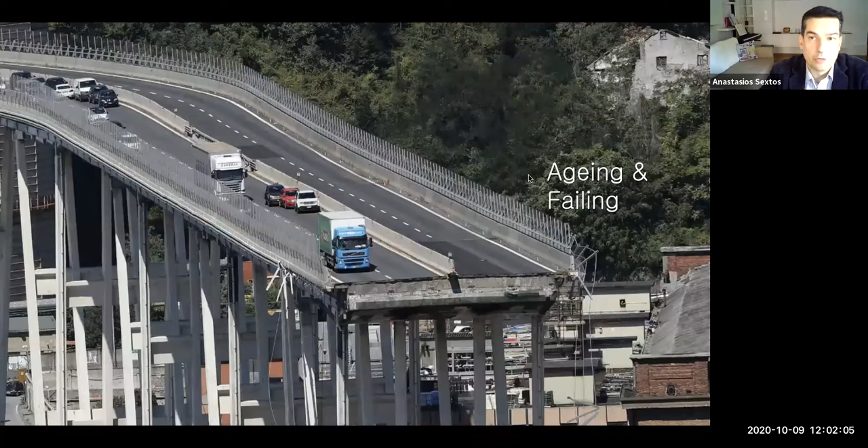So I'd like on my side to share some thoughts with respect to the quantification efforts on seismic resilience for infrastructure communities based on work that we have done in Bristol. All the speakers today have highlighted how complicated this quantification is given the connectivity of our infrastructure and the vulnerability of all assets exposed to seismic hazard and all other sorts of hazards, which can extend from floods to snowfall, fires, man-made hazards, and several complicated gathered issues that our structures experience on top of the obvious fact that they're aging continuously.

So resilience has, as we all know, attracted great scientific attention, but at the same time there are still things that we understand and we know, and many that we don't.

One very obvious thing, also highlighted by previous speakers, is the example from the Tohoku earthquake in Japan. The direct loss was huge, about 300 billion, but the indirect loss associated with a lack of performance of ports and airports and commercial life, social life, lack of access, hazardous materials release — all this was actually having a twice as high toll in terms of indirect loss.

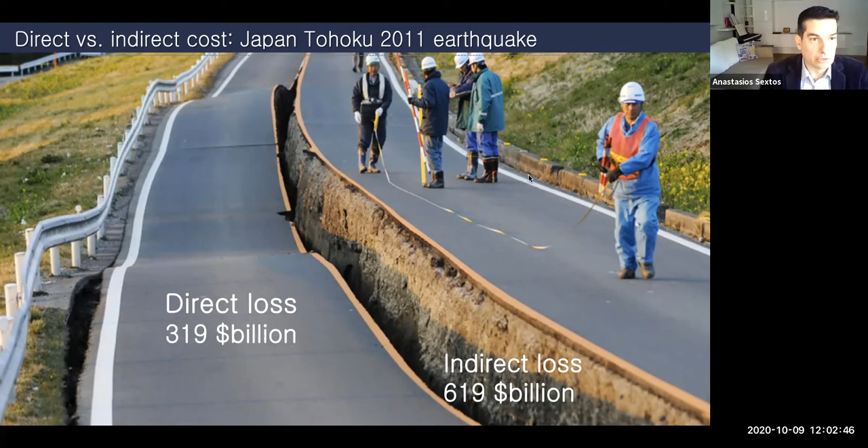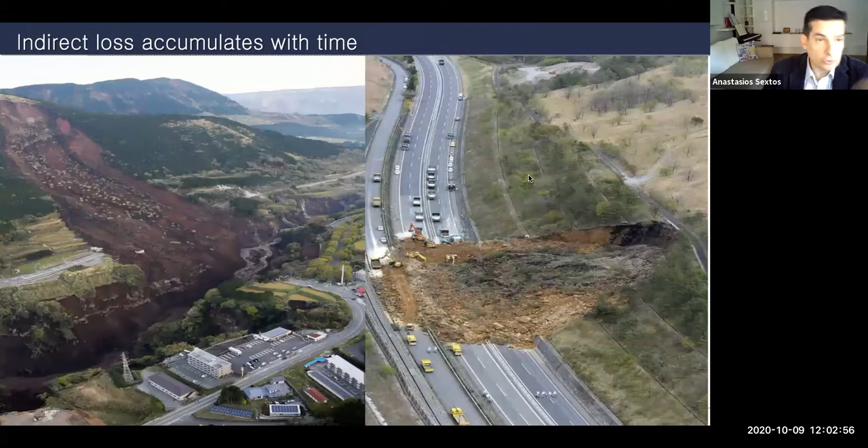Another thing we are aware of is that this indirect loss accumulates with time. The time it takes to rebuild a bridge or reopen a highway accumulates traffic cost and social cost similarly. In some countries like Japan, perhaps this is a bit more efficient and the time is really condensed in terms of recovery — in that case just one week — but we all know from experience that this is not the case in most situations worldwide.

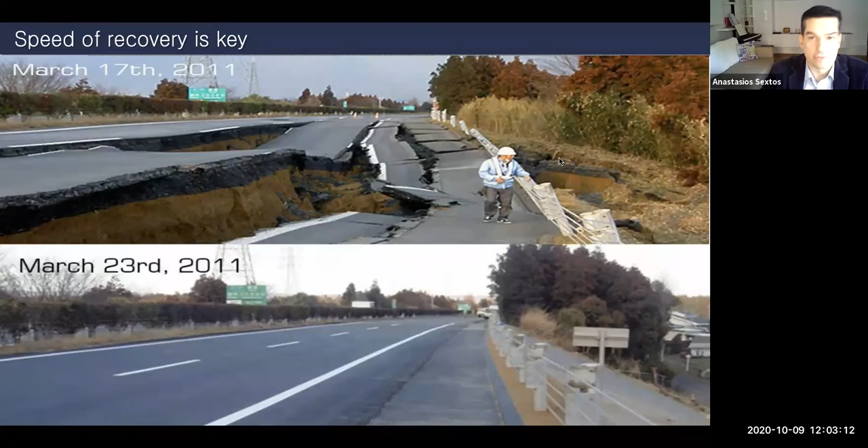So the question is that we need to assess functionality and not just structural integrity, and focus on network and community, not just on a single structure.

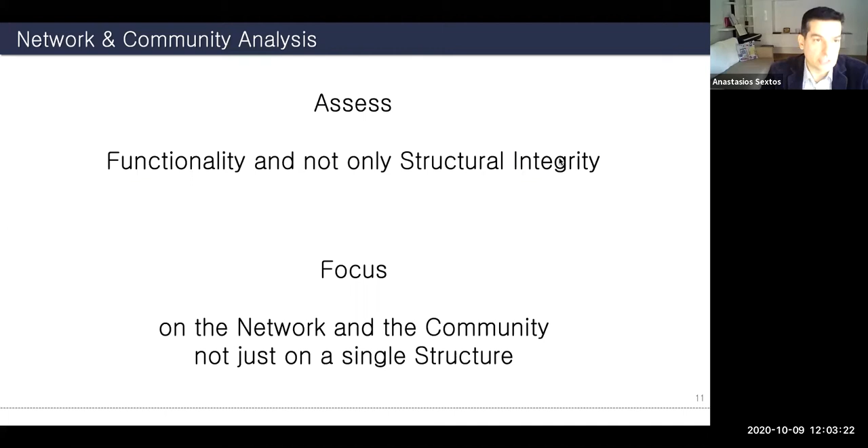Along the same line of thought, the work I'm trying to discuss today covers the challenges and difficulties in trying to quantify our ability to restore this functionality at both levels — in networks and community and agents — in the minimum time and with the minimum cost.

This chart, of course, is well known, so I'm not going to describe it in detail. However, the two key aspects are that we always aim to drop as little as possible, for the residual capacity to be as high as possible — though this depends on the ageing, of course — and then for the recovery rate to be as quick as possible. But then we've got several challenges.

We need to quantify resilience. We need to assess social and financial impact. We need to see whether we can actually measure community resilience in some meaningful way. We need to find this residual capacity, engage with stakeholders, engage with people, and perhaps also optimize our decisions for multiple hazards simultaneously — sometimes these are conflicting issues.

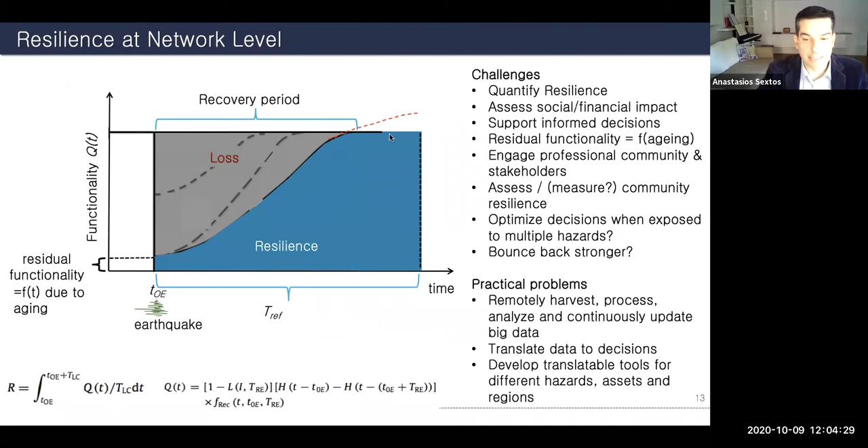And from a practical perspective, we need to remotely harvest, process, and analyze big data, but then we need to make decisions out of them, because that's also a very great challenge and difficult.

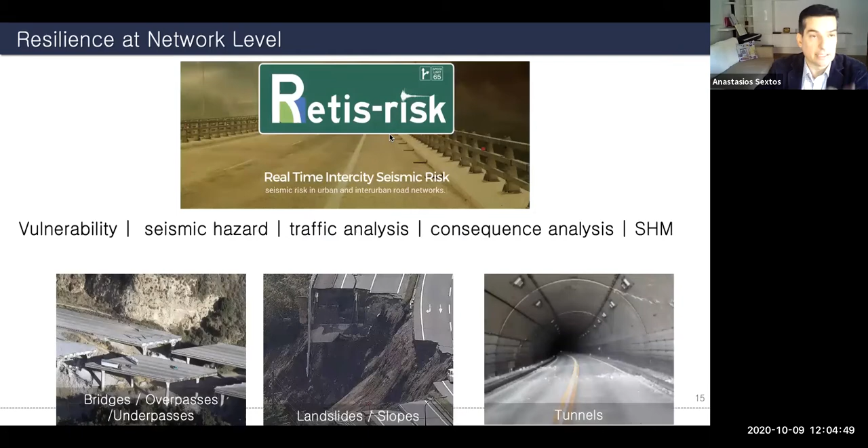So three examples I'd like to discuss with you, jumping directly into the applications. One is an effort — a methodology, a case study, and software — to quantify seismic resilience by convoluting vulnerability with hazard and traffic analysis, consequence analysis, and structural health monitoring for a real case in Europe.

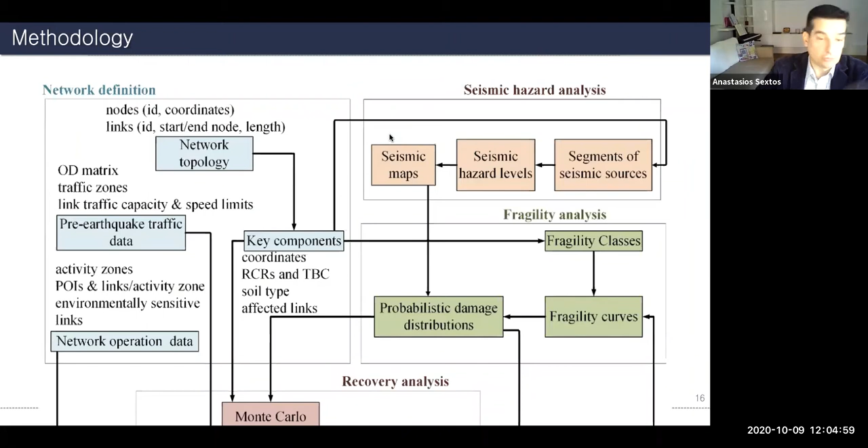And effectively, all the items I mentioned have to be properly modeled, starting from the network topology to hazard and fragility, then a Monte Carlo scheme, then traffic cost and structural cost, and cumulative indicators. But like Greg just presented previously, somebody needs to set some resilience objectives.

That can be loss, downtime, cost, or whatever. But this resilience-based assessment and management of highways, in that case, needed some rigorous modeling of all the stages in the chain that I presented.

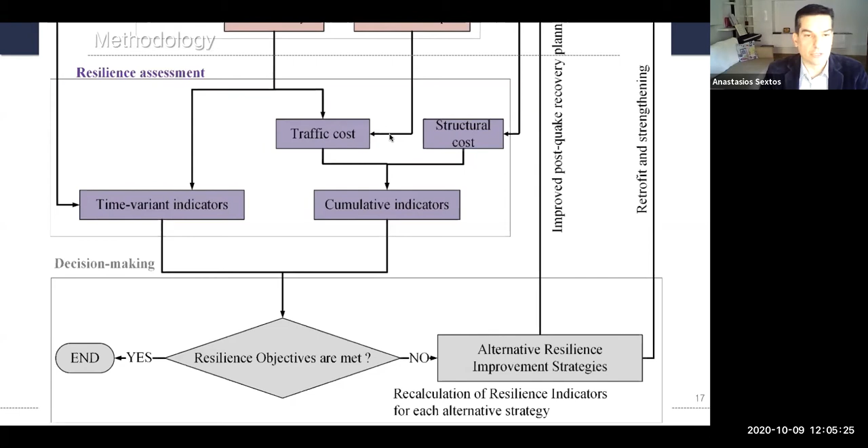So all this has been compiled into a software architecture in MATLAB with an appropriate GUI framework that was linked with a traffic analysis software.

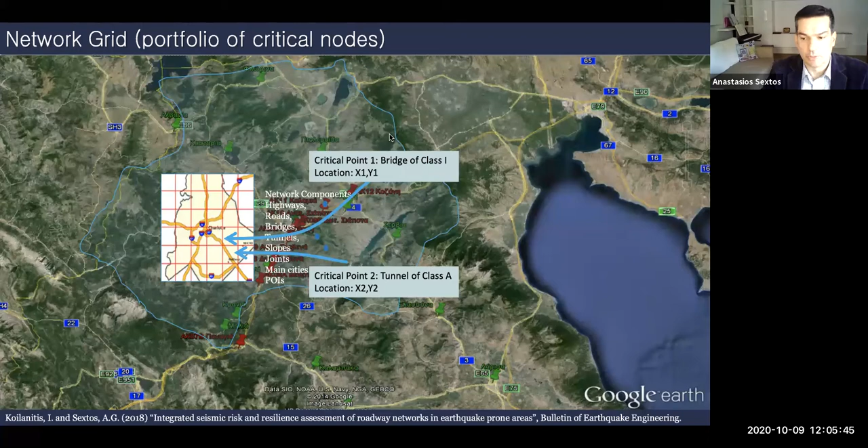I would like to mention, quite briefly, the challenges we faced. After, of course, we did the obvious, which is to model the topology of the critical components that can break the operation of the highway, like bridges, roads, tunnels, slopes, and other joints that can disrupt traffic.

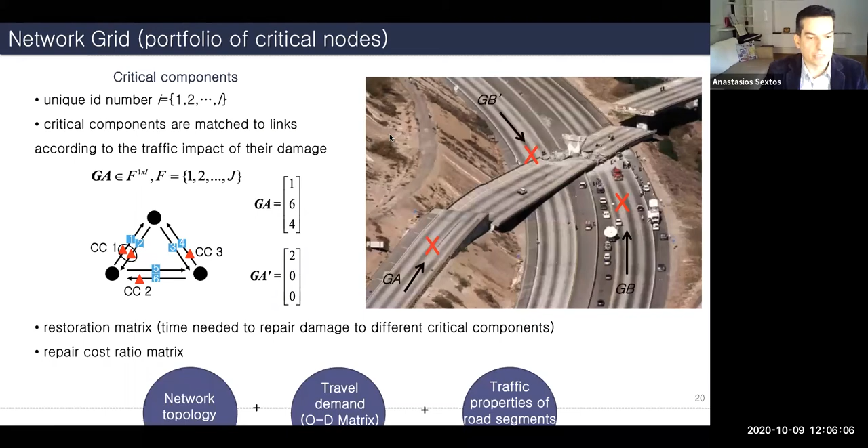Of course, one had to liaise with people from transportation engineering so that we were able to get data from the highways to model the links properly, and map properly the restoration matrices into the ArcGIS map.

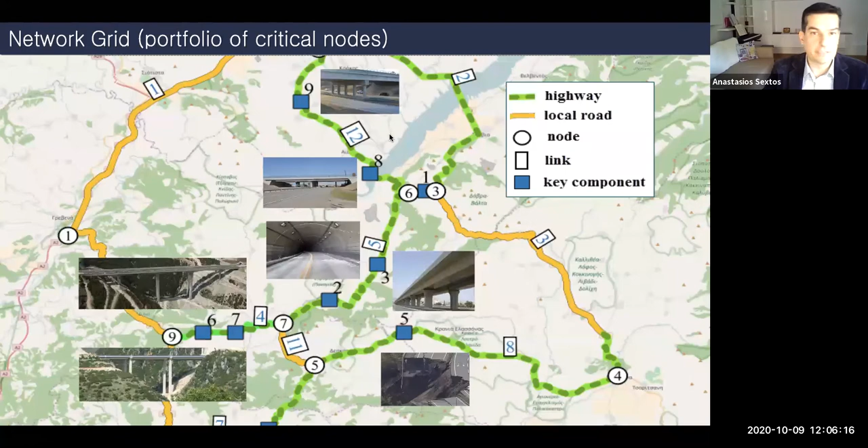Once these data are collected and plotted, structures need to be classified into different structural typologies in terms of their different fragility and performance for a given intensity measure. And that can be done pretty easily with respect to the experience that most groups might have.

But then the challenge is how to quantify seismic hazard in a scenario-based approach, because this is not a case where we can apply a standard PSHA. We need to have a scenario basis for different hazard levels of a fault rupture, which has to be a line in space, because otherwise it is going to cross our network and influence simultaneously several different points.

And then the intensity measure distribution in space has to be accounted for rigorously for every different scenario. This brings us to a number of maps, a number of hazard levels, a number of seismic faults and segments per fault, intensity measure distribution maps, and then all this procedure needs to be taken into account in a Monte Carlo simulation to assess probabilistically whether a road will be closed, depending on the fragility of the assets, or not closed, for every different map.

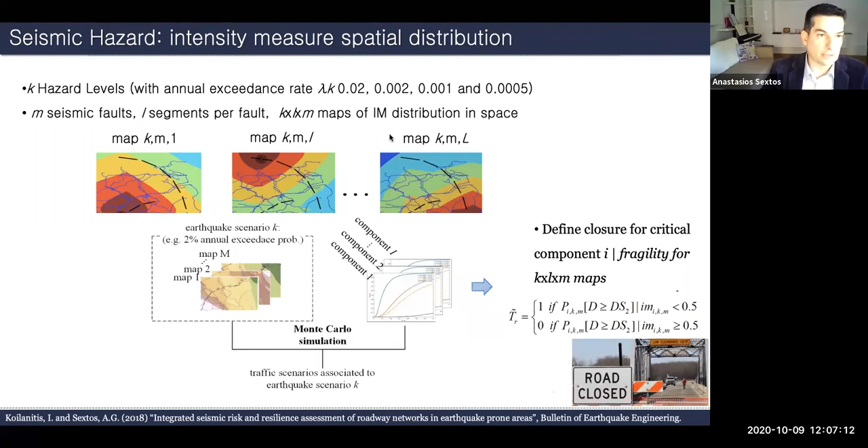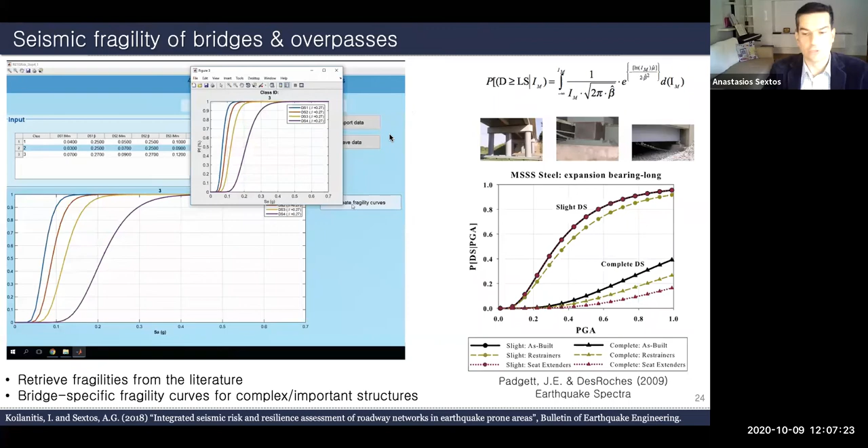And then this was integrated, like I said, into a software, feeding in fragilities that you can get from the literature, or you can define yourself, or you can do refined analysis. But the challenge here, of course, is to make a decision.

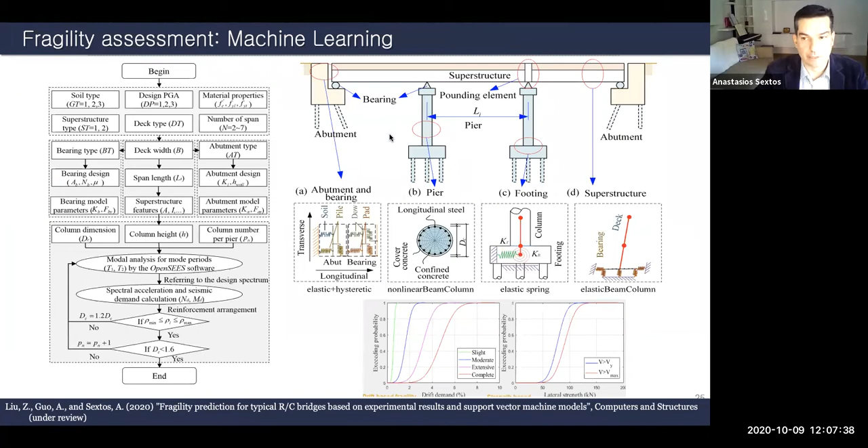You can even use machine learning, like we've done in another case, to feed in several fragilities so that the system can pick and decide, for a different portfolio bridge, whether it should be used, which fragility should be used for each case.

But clearly, this has a degree of imbalance, because for bridges we're very experienced. For slopes, for instance, this doesn't exist. And slopes are different also in terms of the intensity measure that is relevant, and in terms of limit states. Analysis cannot be done due to the spatial extent, which makes things more complicated.

So we introduced an analytical approach here. But again, like I have to confess, this is quite imbalanced between bridges and slopes.

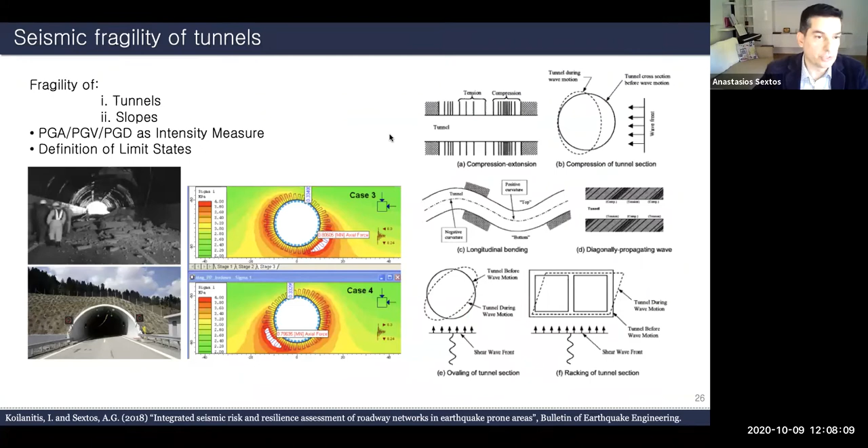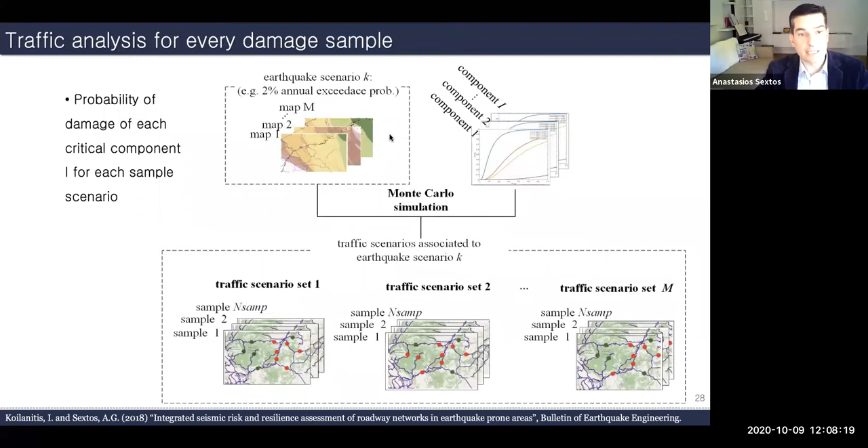And then another challenge is to quantify with the stakeholder the repair costs and restoration times, and how much it takes to recover, and then repeat this traffic analysis for every different damage scenario, and then open up the data to an external open source QGIS software, plotted in a QGIS software program for analyzing traffic redistribution for every scenario of open or closed assets along the network.

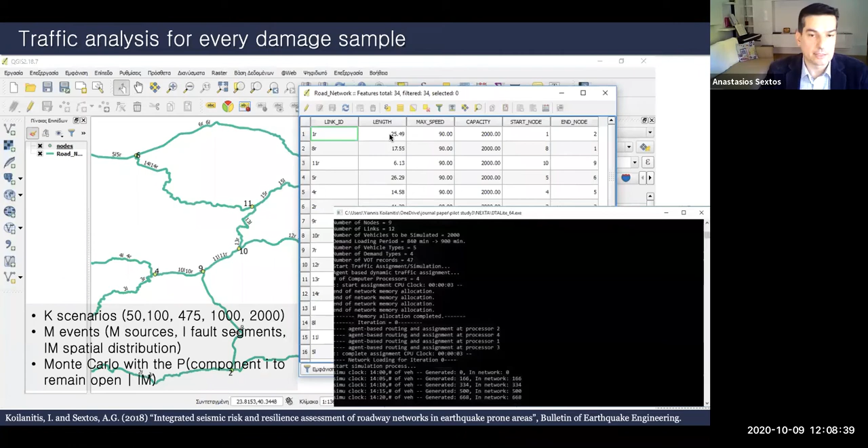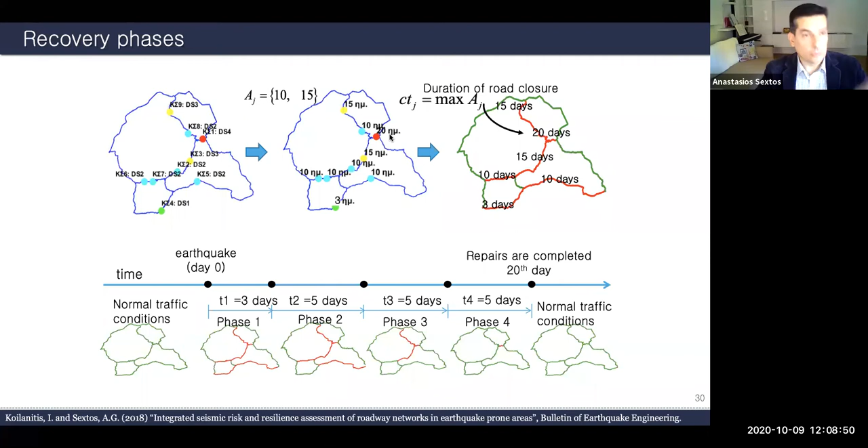This, of course, brings every calculation in stages. You can see here that links can be red for every different scenario, and gradually in time they will become green. But this means that in every different step, you need to recalculate traffic redistribution.

And then, of course, you've got an instance in time of functionality, of direct cost, of indirect cost, and then you accumulate that, and you can plot, at the end of the day. I'm just going to show one final slide, a prediction for the stakeholder in monetary terms, let's say in euros in this case, of what it would cost you, for instance, if you do nothing, for different hazard levels.

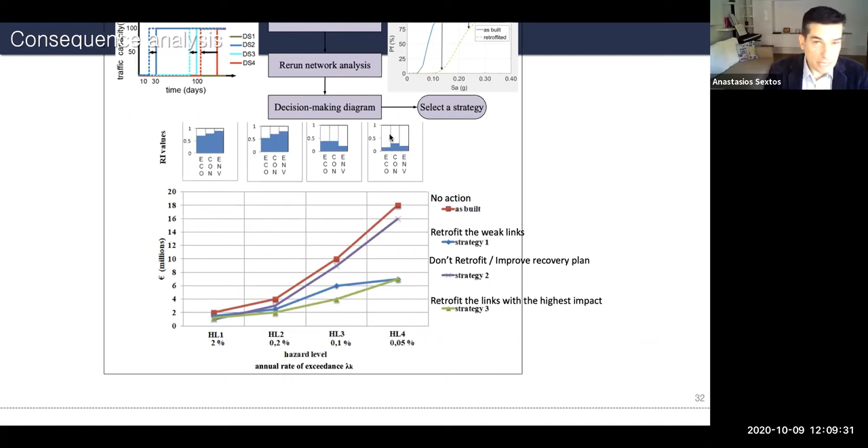This is the red line, no action, or the purple one, if you don't retrofit but just improve your recovery plan, so you reduce the repair times, or you can do even better if you retrofit the weak links, which would actually be the obvious thing to do in most cases, or even better, which is the wiser thing to do, if you retrofit the links with the highest impact.

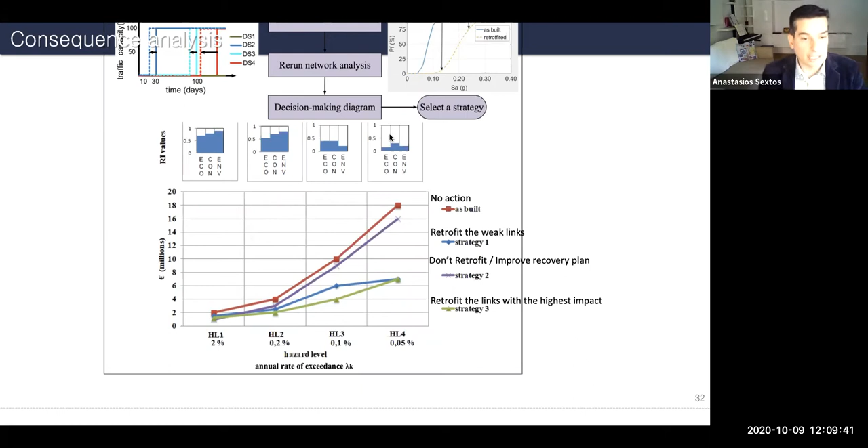So this is a consequence analysis that has much better performance in terms of meeting the resilience objective set previously. And then again, of course, the question will open: is it worth investing in a life cycle scenario?

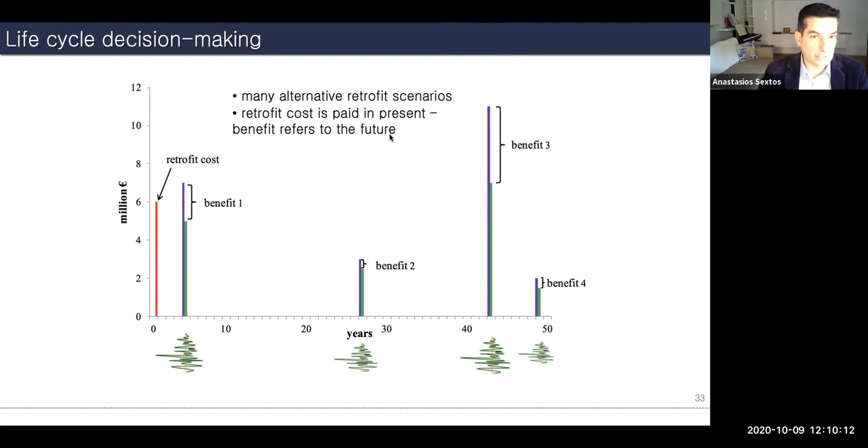All these funds now to retrofit the weak links, or the links with the highest impact, and get some benefit probabilistically down the road, or we'd better do nothing and just wait for things to happen—this will be better socially, financially. In my opinion, the answer always depends on who bears the risk in terms of the stakeholder. It doesn't have an obvious mathematical answer, in my opinion.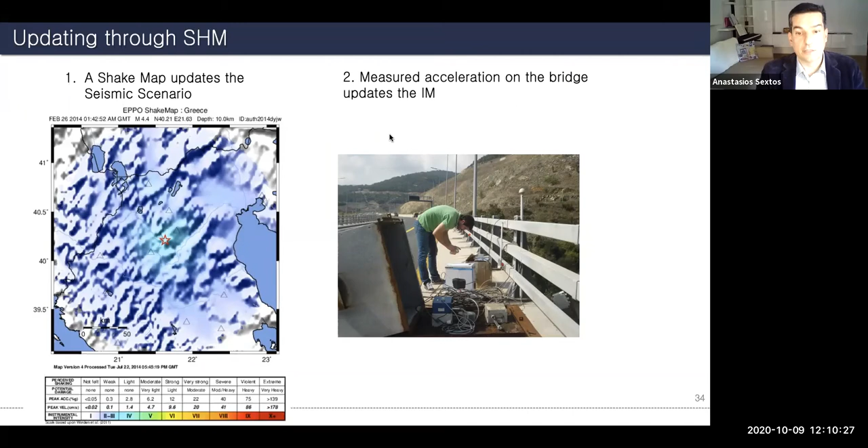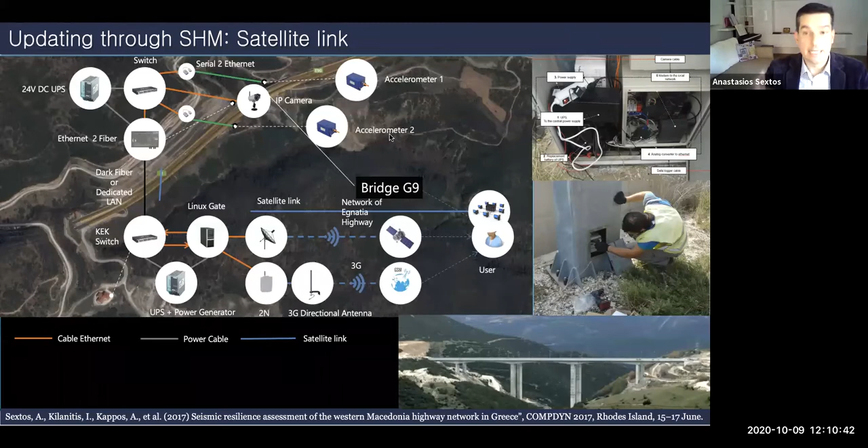In terms of structural health monitoring, we extended this application by using shake maps to update our prediction, so that after an earthquake we don't have a scenario, we have a real distribution of IM. This also applies to the spectral acceleration on the bridges that were monitored. You can see satellite links on the bridges so that in case of energy disruption, we could still get signals and update our scenario, so that the stakeholder knows probabilistically, given their fragility, which bridges most probably have failed, so they can inspect them quickly.

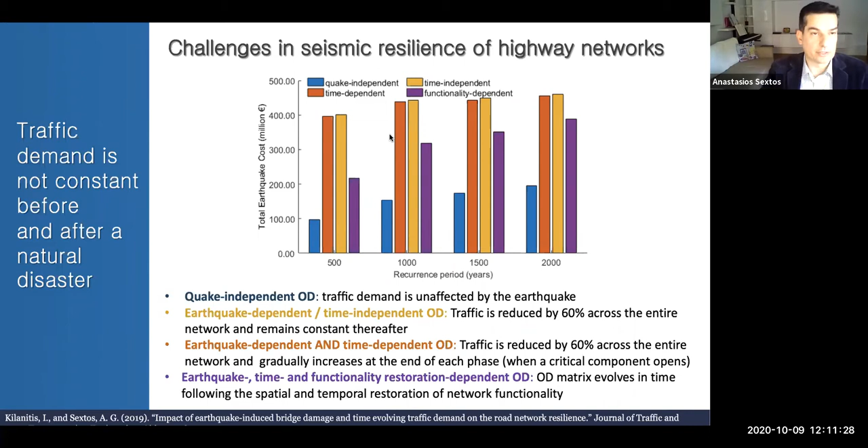Now, some limitations I'd like to share openly. This methodology assumed that traffic demand was identical before and after the earthquake, which obviously is not true. So we repeated this exercise with different degrees of traffic disruption, because after an earthquake we don't go to work—we do a U-turn, maybe we go home. We see how sensitive seismic resilience assessment is when we introduce variation of traffic driver performance, agent performance during crisis. That's an important aspect influencing the OD matrix.

Secondly, whatever we assume and predict is only as accurate as our assumptions in terms of fragilities. For overpasses, we need proper modeling. We can use the Caltrans curves, but at the same time, in terms of fragilities, we've got nonlinearities and multiple, very complicated abutment types around the world. Given that the backwall is sacrificial, this requires more refined assessment.

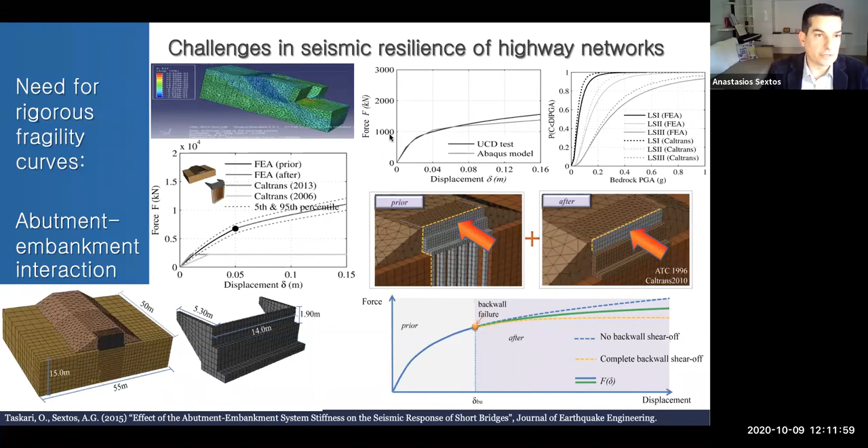At the same time, we know very well, and this is important for both bridges and overpasses, that soil structure interaction is frequency dependent. The reason we don't model that is that frequency dependence cannot easily be translated into the time domain with the usual impedance functions. Also, if we want to model the entire holistic soil structure interaction system, this becomes huge and prohibitive for Monte Carlo assessment.

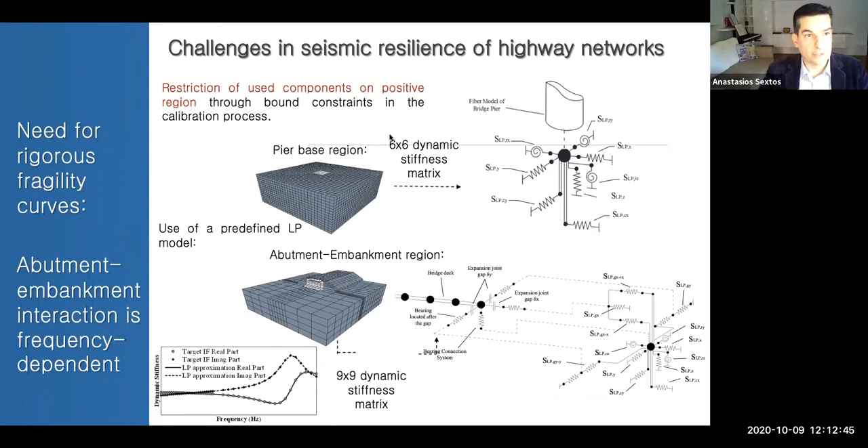For this purpose, we try to hack it a little and introduce lumped parameter models—mechanical analogs that basically map an impedance function; they operate in the frequency domain but are implemented in the time domain. So we can use them as a low order FE model that can be implemented quickly and efficiently in Monte Carlo simulations.

You can see here the extension for plastic analysis with a macro element that was also introduced. Is that important or not? Well, if we repeat the exercise for different damage states, with and without frequency dependence, we see an error of almost 80% for soft soils, particular pile configurations, and particular frequencies. So it's not negligible—we'd better have it balanced when doing this analysis.

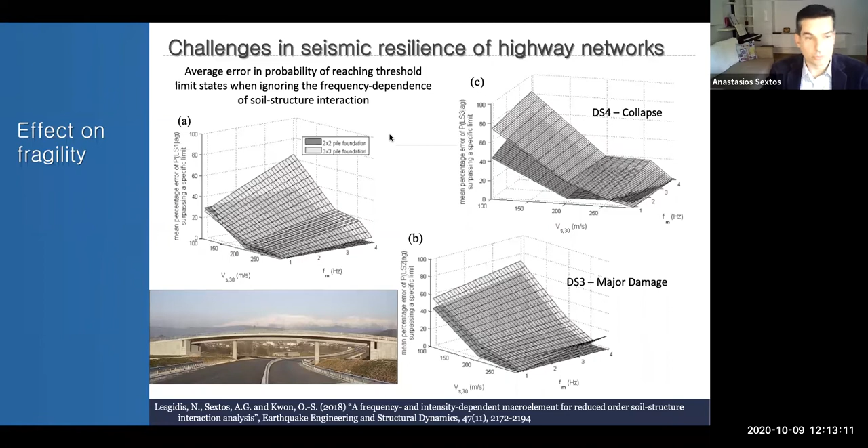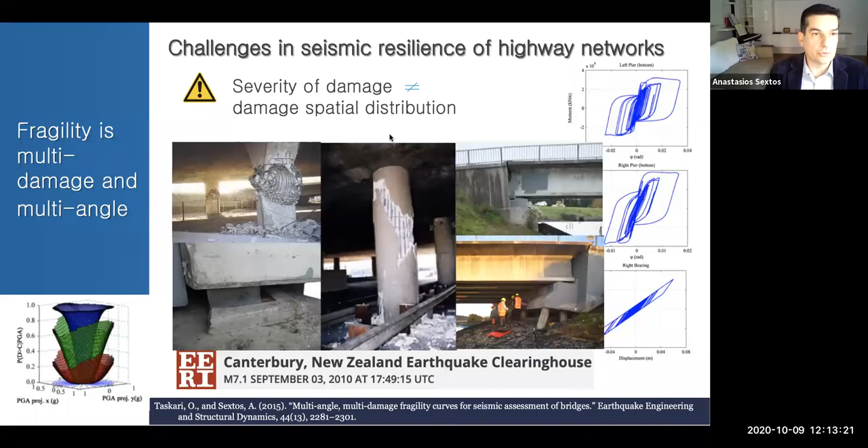The same applies with respect to multi-damage assessment of all our assets—it's not just a single damage, but several damages. Directivity is also important. What I'm saying is that proper modeling is important. I won't go into too much detail, but we need to make sure that whatever has influence on our prediction is modeled properly.

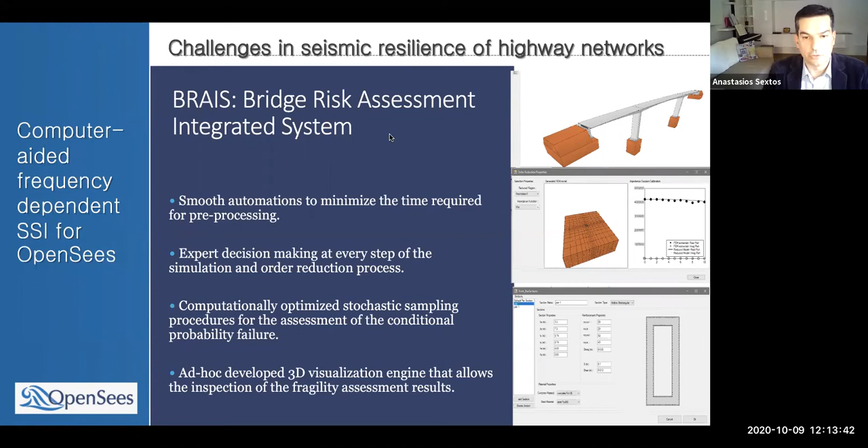And we made an effort to develop software that incorporates all these assumptions into OpenSees, so that this is easy to do in an ordinary assessment without getting too deep into the theoretical background.

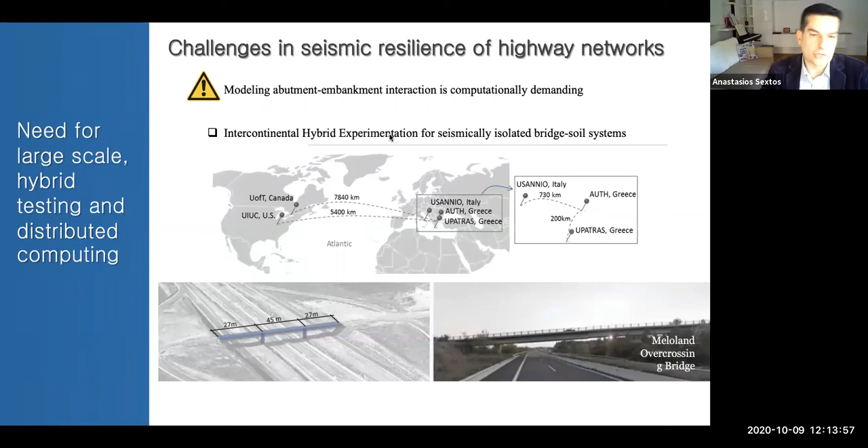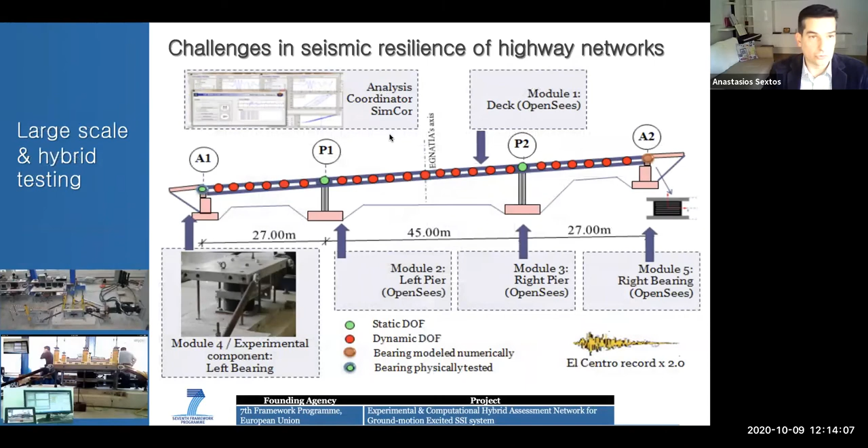The second application I'd like to show is how our computations were linked with experiments in light of hybrid simulation. Of course, I'm not bringing any news, because hybrid simulation has been around for many years. This is a simple highway bridge that we tested a few years ago, physically and computationally. I show this particularly because when we try to do this between Europe and the States, yes, this is standard technology, we know how to do it, but the main challenge is the latency when crossing the Atlantic—it's almost 100 milliseconds.

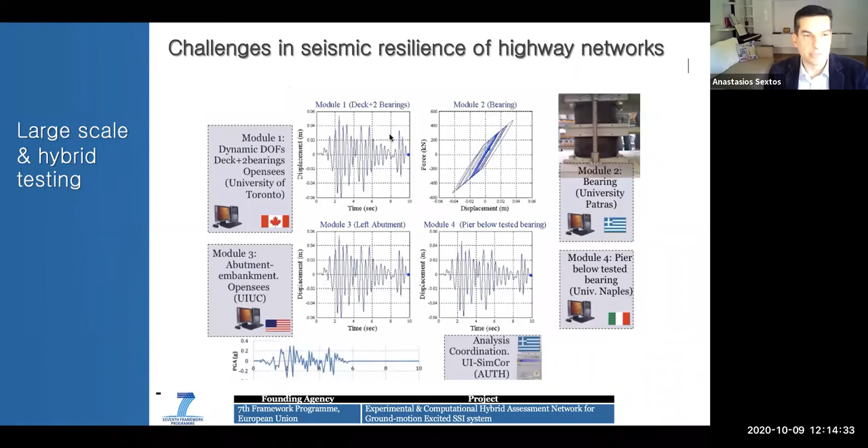This is just to advocate for the necessity for better internet connection, better 5G probably, or dedicated lines that can perform real-time hybrid simulation between Europe, Asia, and the States in order to combine computational and experimental frameworks.

The second example is an effort to translate what we did for highways to pipelines. Here the challenge is twofold: the fragility curves are super simplified because they're actually repair rates, since due to the extent of pipelines, water or gas, it's very difficult to model them rigorously. This led to the perception that earthquake ground motion variability has zero effect on pipelines. So we did a very large computational model to see whether this is true when soil properties change, which was not true for bridges, and it's actually not true for pipes as well.

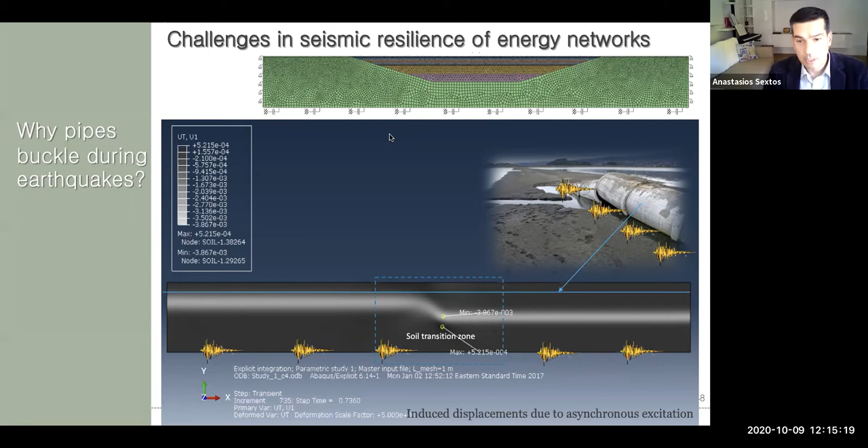In that case, we substructured the system between the far field and the near field, and we did quite a rigorous simulation, including buckling of the pipe due to differential axial strain and soil-pipe interaction, introducing friction at the interface, and all that.

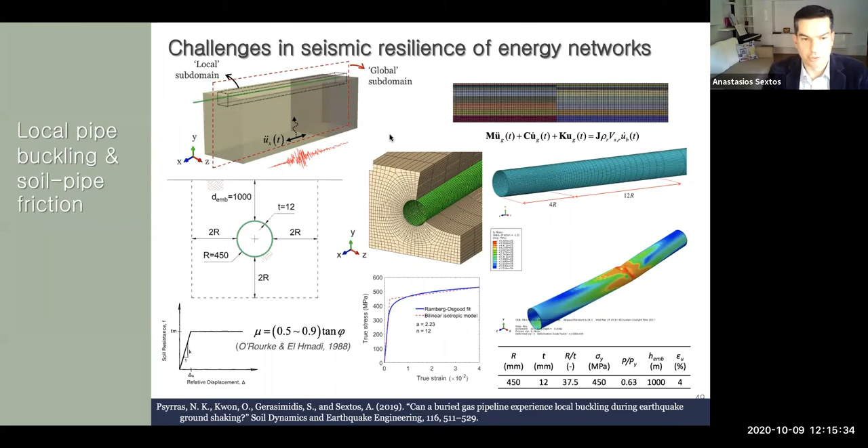At some point, that's the open question: do we really believe our analysis, or do we really have to apply some experiment to see whether that's valid or not? Because analytically, we've seen that the regulations actually suppress the possibility that differential strains can buckle the pipe.

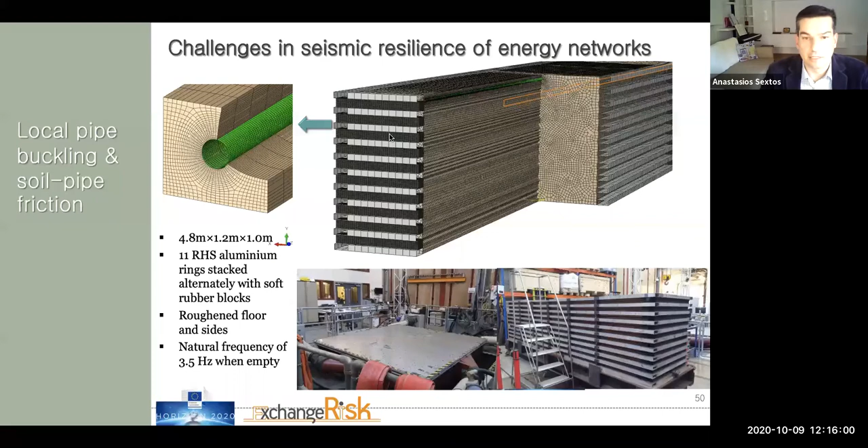But the truth is that both numerically and experimentally, as we checked using a soil box on our shaking table at the University of Bristol, it was shown and measured by fiber optics along the pipe length that this would be the case if soils change abruptly in properties in space. These are the pipe axial strains that correspond to pretty much 60 or 70% of the critical buckling load, and if we change the scale to real scale, yes, it can buckle.

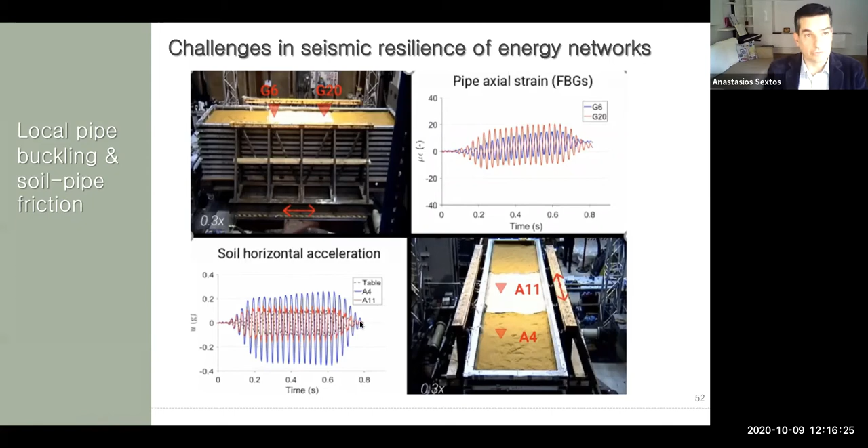So the question is, do we stick to the analysis, or do we really have to do some testing? That's an open question, of course.

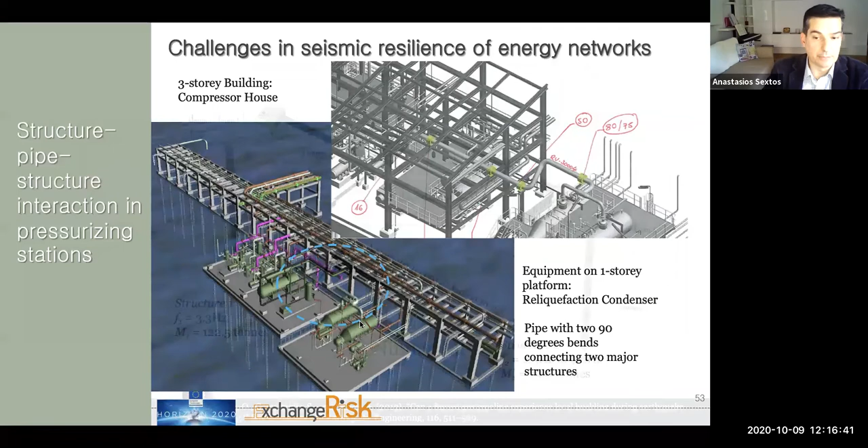Similar problem when we've got a pipe in a pressurizing station connecting two buildings. These two buildings effectively have different dynamic properties and are linked with a connecting pipe. We model that numerically, but then we substructure it between physical and numerical testing. What we found out was that the influence of the connecting pipe can harm both the structures and the pipe itself.

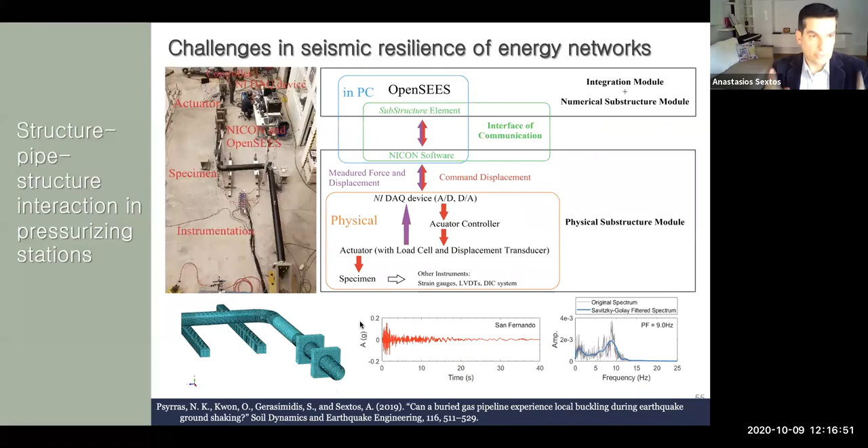By doing this substructuring and hybrid testing, we repeated the experiment: the physical test was at the University of Patras, and the rest was at the University of Toronto and the University of Bristol.

At a glance, you might think that's not a hybrid test. But the truth is that the dynamic properties of the two buildings actually change as the connector gets damaged, because it's a coupled system. Therefore, with this hybrid test, again, it's actually verified what we could predict numerically.

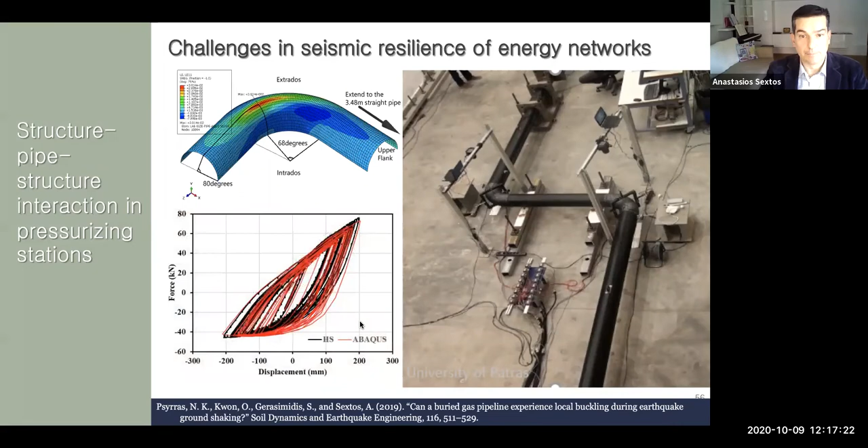Going to my final example, because Seth said previously that resilience is all about people, and I fully agree. So I'll take you to the most humble version of resilience we've done, skipping some interesting tests I could show. I'd like to share an effort to quantify resilience for school communities in Nepal, in collaboration with the World Bank and Asian and American universities, showing something very basic: a humble, smart application to inspect buildings and assess community resilience.

Now, this seems very simple, and we could easily use the FEMA guidelines. But the problem is that the probability of collapse we can get from European or US standards is not applicable for Nepal. We've got 39 structural typologies, a scarcity of data, and huge uncertainty in construction practices.

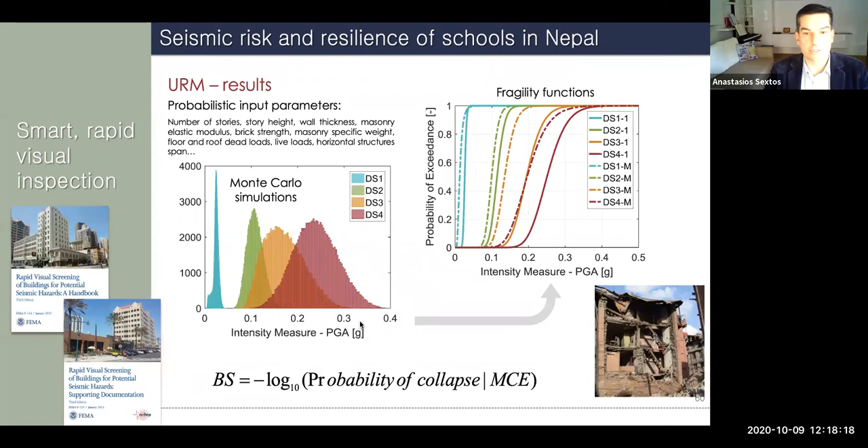So in order to predict fragilities and probability of collapse, we need to gather data. The best way we found to do this was to liaise with the World Bank and develop empirical fragilities of masonry school buildings based on the post-earthquake data that were very rigorously and carefully collected after the Gorkha earthquake.

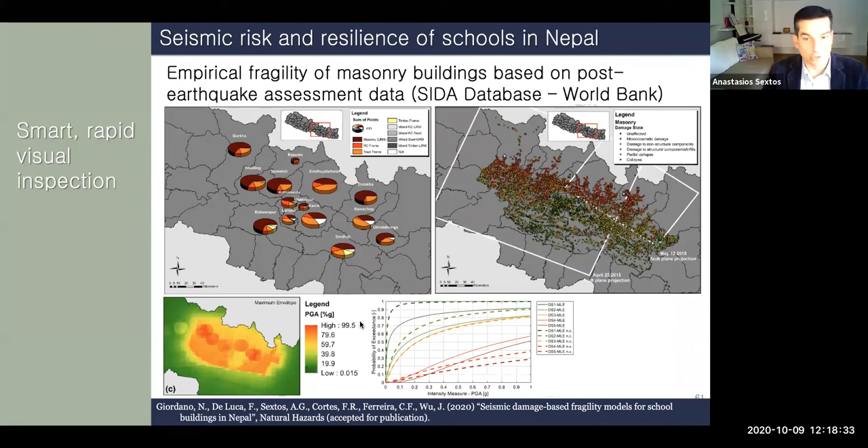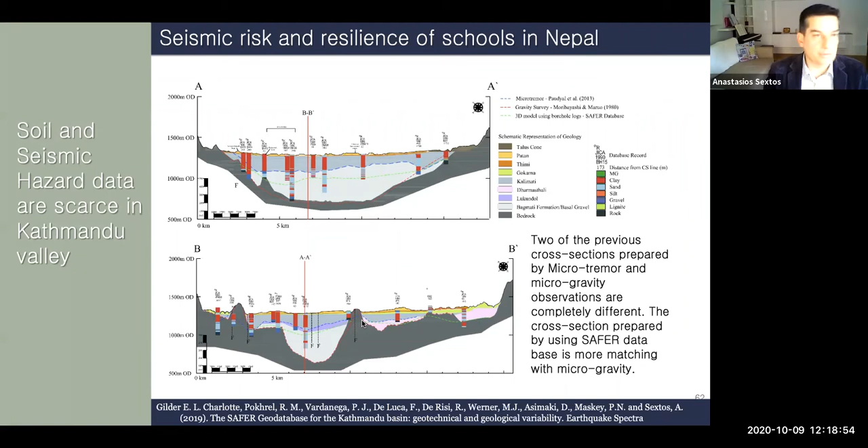Secondly, because we didn't have information about the soil, we had to do our own drills in the Valley of Kathmandu to collect geotechnical data, and rebuild everything we could find in the literature into a geodatabase in 2D and 3D form, so that we could present these VS maps and do microzonation studies to help us understand a bit more about ground excitation.

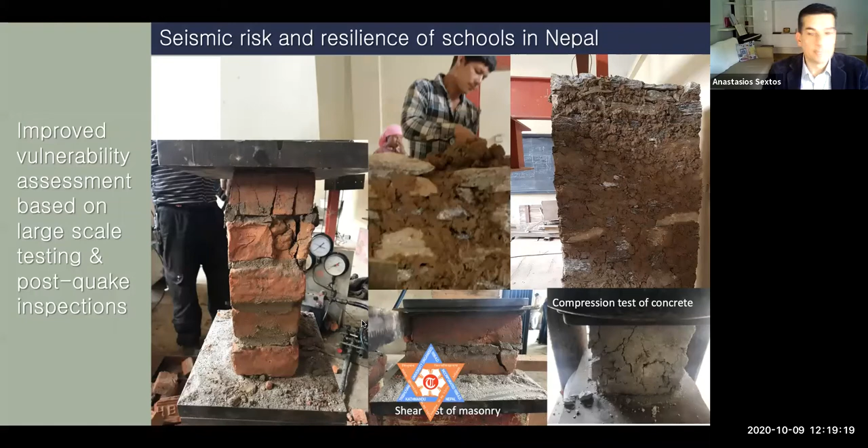But then again, in terms of materials, what kind of values can we use for the fragility analysis? We had to do our own testing, material testing, wall testing, and not just one or two of them. We had to repeat 10, 15 structural build and test, structural walls on site, so that at least we can assess the dispersion of the material properties for different structural, cultural, let's say traditional typologies.

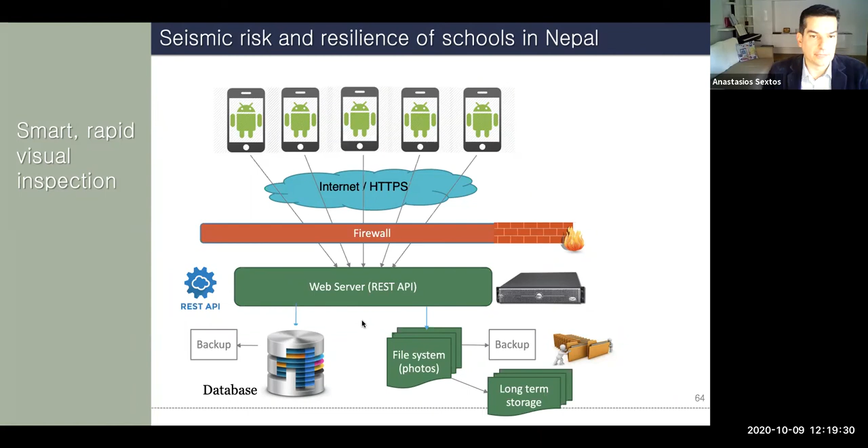And then this was presented and integrated into a mobile app. You can see here the mobile clients through a firewall, they feed data into the server. The app is pretty simple. It asks specific vulnerability items, hazard and soil properties are input automatically given the GPS location.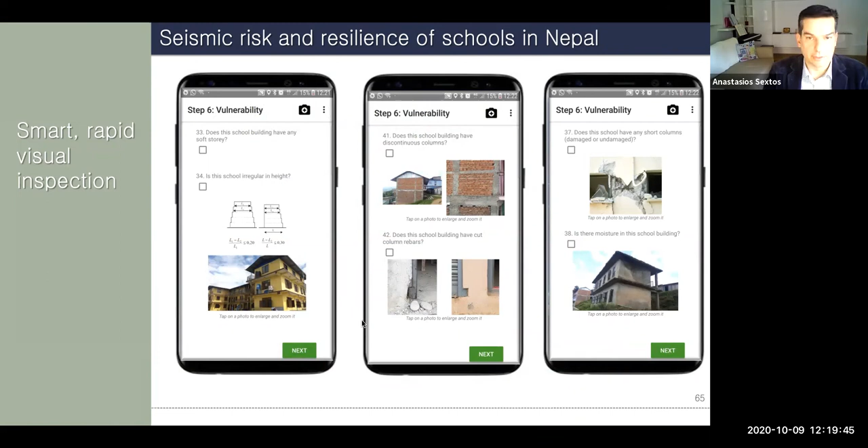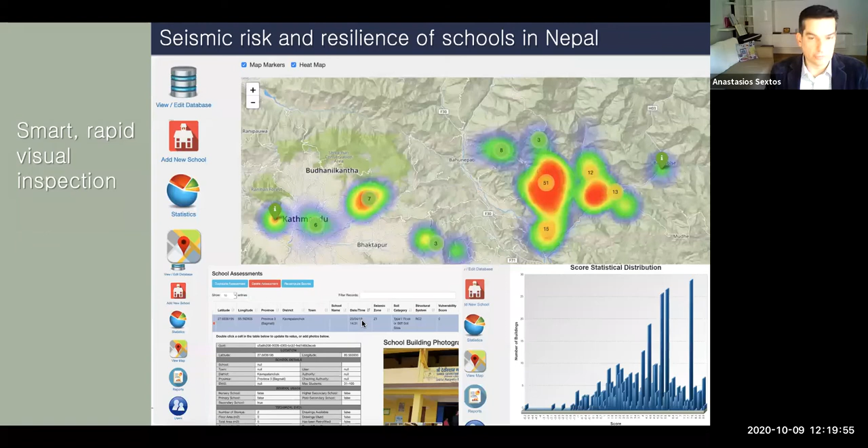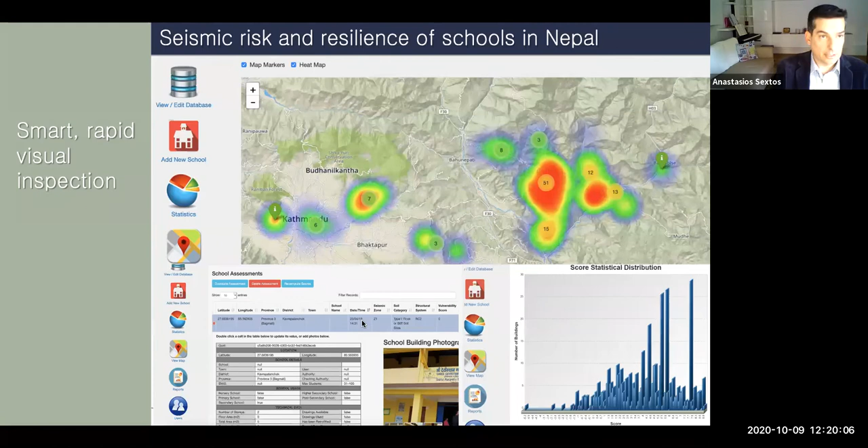And then this information is fed into the GUI of the web app, which doesn't require any software, but the stakeholder, in that case the Ministry of Education of Nepal, is able to assess which are the buildings. We've got already more than 500 school buildings assessed, which are the buildings that should be prioritized in terms of risk. That is both hazard and vulnerability and exposure. And we have released that for the benefit of the Ministry of Education.

So a few final comments, if I may. Going back to our initial discussion. Can resilience be quantified? I think yes, but we also need to have a balanced rigor in assessing uncertainty among all aspects that influence resilience. Secondly, community resilience is clearly multidisciplinary and multi-hazard, and sometimes the objectives are conflicting. So we do need a holistic framework that convolutes computing and testing and probabilistic assessment and smart tools.

Computational power, in my opinion, is not enough. We need some intelligence, particularly to fill some gaps when we don't have information. And big data is huge, but again, perhaps we need to make sure that we make sense out of this data. They are clean, they're reliable, we can make decisions with them.

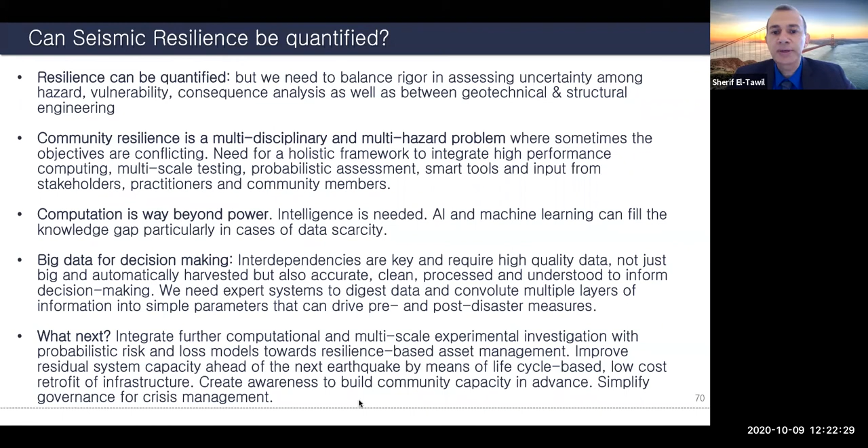Thank you, Tassos. Very interesting presentation. You covered a lot of ground in many different fields and disciplines. There is one question that I see here, and this is from David Bonowitz. It says, regarding the app for inventory of URM schools, is this the tool that Build Change is using? We are in collaboration with Build Change, yes.

Okay. I have a question myself. You have covered the response of different types of infrastructure systems. They come from different disciplines. And I asked a similar question to Seth Guikema as well. How do you get the models from those systems? Do you develop them yourself and then link them with what you're doing? Or do you get collaborators from those fields and then work with them?

Well, that's a very good question, actually, Sherif, because I think that when shifting from one discipline to another, or from one type of infrastructure to another, there must be a common basis of understanding and mathematical framework, but there is always need to liaise with different disciplines in order to contextualize what you're doing for the appropriate industry. So from project to project, we always engage industrial partners, stakeholders, and regulators that are relevant to the context. We aim to apply our probabilistic or computational tools so that we make sure that whatever we develop is co-produced and useful.